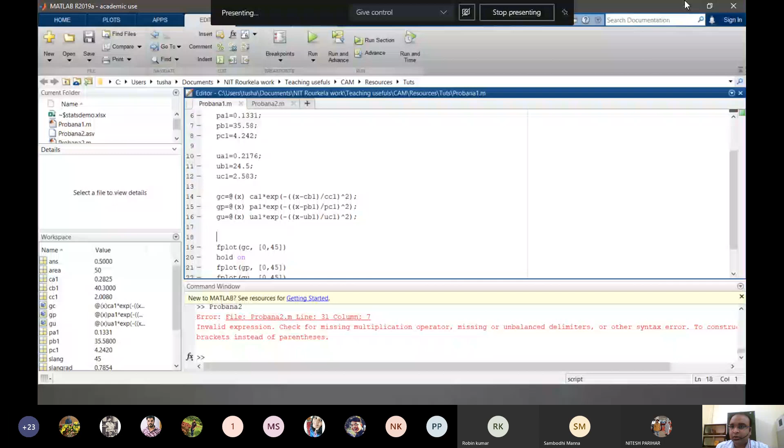So just to recap, we were making probability distribution functions. We were generating those, and what we did till now is we basically saw some randomly generated data, and on that randomly generated data, we converted into the frequency distribution for cohesion, friction, and unit weight.

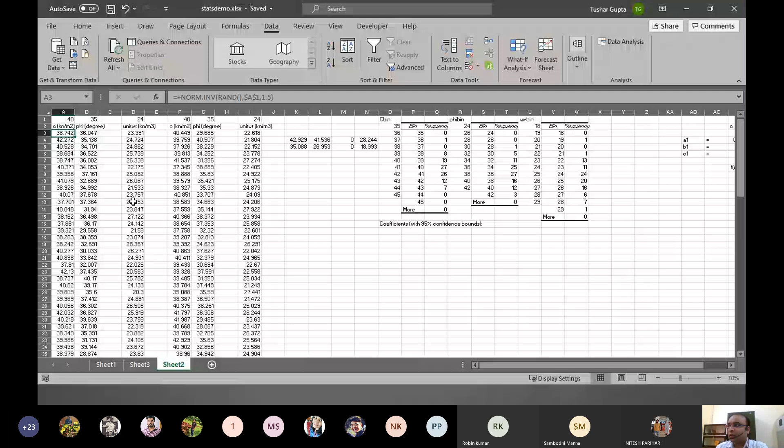Based on this, we did a curve fitting analysis, learning how curve fitting works in MATLAB. We saw what the parameters are, goodness of fit, and so on. On the basis of that, we fitted an equation representative of a normal distribution, a Gaussian type equation with three constants - two representing mean and standard deviation, and one being 1 over 2 pi of that standard deviation, the fractional part. Based on those, we calculated all three by the curve fitting method for all three distribution functions, and found the coefficients for this equation.

We actually tried to plot it. We saw how a function handle can be defined in MATLAB - a function handle basically gives a relationship between x and this y value, so y is a function of x represented by the equation that precedes it. So that's where we had reached. We were also seeing how plotting can be done.

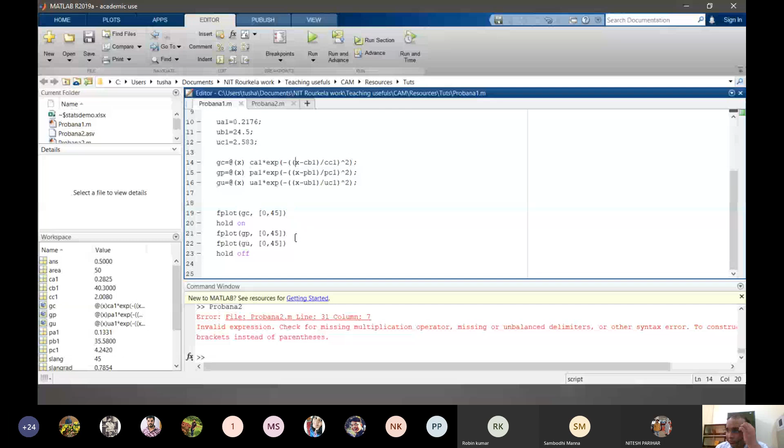Plotting is easy - the function fplot was used, and we gave a range for which range we want to plot, and a hold function that helps us in plotting multiple equations or multiple plots on the same figure. So we were plotting all these three Gaussians. Let's see where we reached last time.

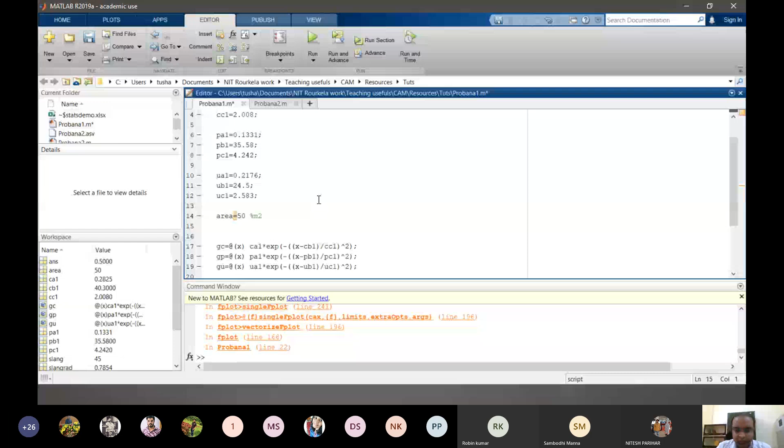And what else we need? CA, and we need the psi values or the psi p, the angle of the slope, for considering a typical angular problem. So angle of the slope, let's take 45 degrees. Slope angle, okay - slang equals 45 degrees.

Just to make us remember, we are making some comments on that. Do remember that when we do some cosine functions or sine functions - for example, let's say we want to find out what is tan 45 - just the normal functions actually take 45 as in radians.

So this has to be basically converted - 45 degrees have to be converted into radians. We can simply do it by multiplying by pi by 180. So that we have to take care of - either do it during the equation formation, or we can do it here.

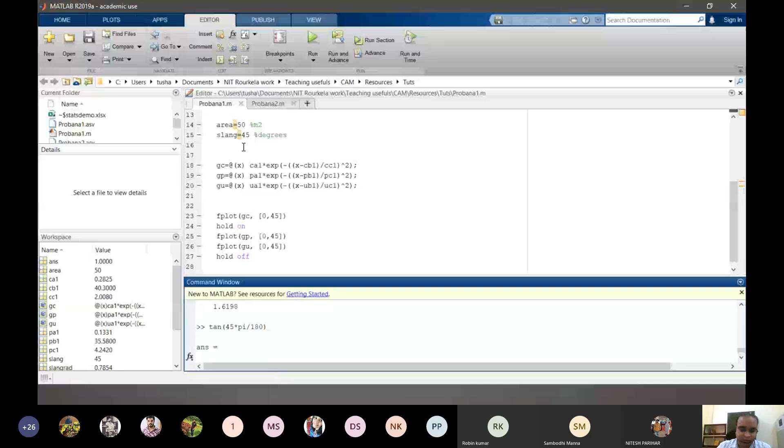Slope angle in radians - so SAR equals slang into pi by 180. I think this should work. Let's put some braces.

Semicolons will not produce extra answers, so that's okay. Converting to radians. Correct. Now, these definitions are already done.

Let's keep them as it is. But we have to define it again, I'll give you the reason. The intuitive way to do something like this would have been just directly using our formula, that is Ca plus sigma tan phi, and sigma can be the W cos theta component, or the unit weight cos theta component, cos psi component. So let's do that.

Let's find the forces now. So forces, uh, these are plots, so let's remain them as plots. Okay, and these are the inputs or variables, just to segment them properly.

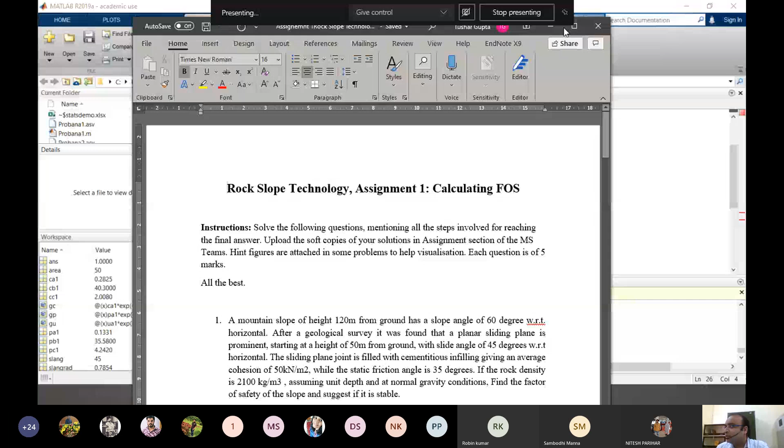So we used, we had the first assignment of RST, right? So let's use those to just calculate one problem here. We already have unit weight and other values, so what we need now is just the geometry.

If this one has something, if the rock density is that's okay. This is given, this is given, this is given. So let's use this answer, the solution for this, and try to simulate. We have this demo, hold on.

So for this question, we have area of 50 meters square that is there, and what we have is a weight of... how much weight do we have here? Which question is this? 5210... 2100, right? So, yeah, just a sec.

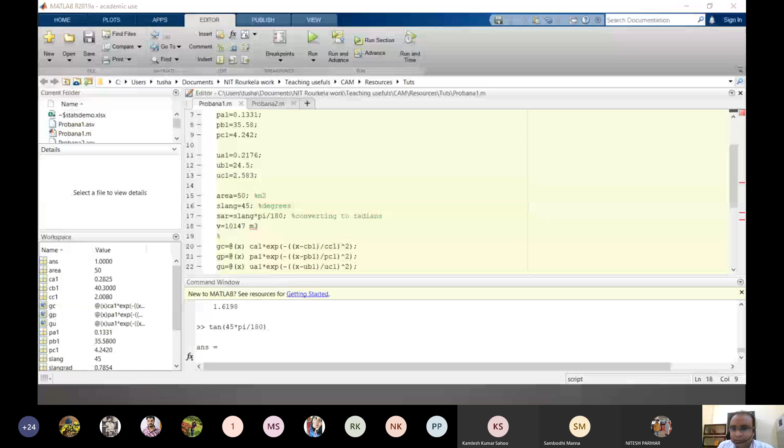So volume is this. For calculation of forces, we need certain more functions, like for driving forces, we have W sine theta on the lower side. So what we'll do is we'll calculate the weight. So weight will be, let's make a function in this way, the weight x, and weight will be volume into the unit, so it can be the unit function, the whole this, right?

Let's paste it here and also multiply by volume. So this will be W, and we can actually enclose it in one bracket and put a sine. I think this works, right? So FD can be this.

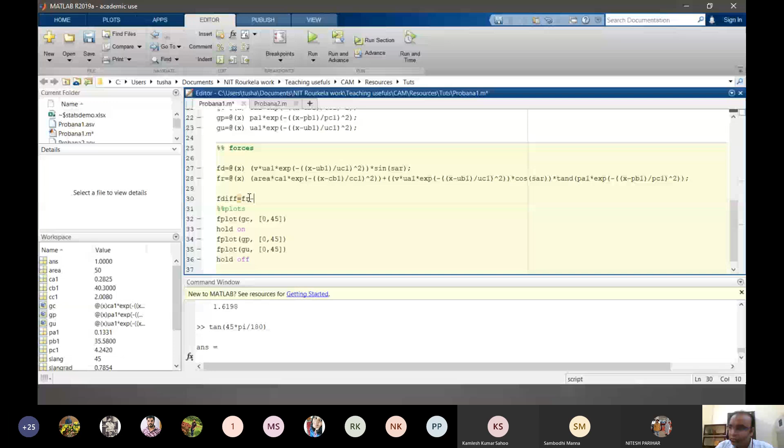All done. So what we can do now is let's plot this and see what happens. We need two more things. We need a difference function, so force difference equals Fd minus Fr, that's simple. Oh sorry, Fr minus Fd, the resisting force minus the driving force, right? And we also want to calculate the factor of safety function, so we'll do that later on. Let's first see where we have reached till now.

So let's plot Fd and FR, let's keep this in. I don't know what the ranges will be, so let's just plot it and see if we are meeting the ranges. Fd minus FR, remove this now.

And run. So where did the plot go? So these are the plots.

The good thing is both are well separated. So for our case, the difference will be too much.

So the orange one is our FR, the resisting forces, and the blue one is our Fd, the driving forces. So essentially what we are measuring here is the forces in kilonewton, and the distribution is shown in terms of units on the y-axis, showing how much that is distributed.

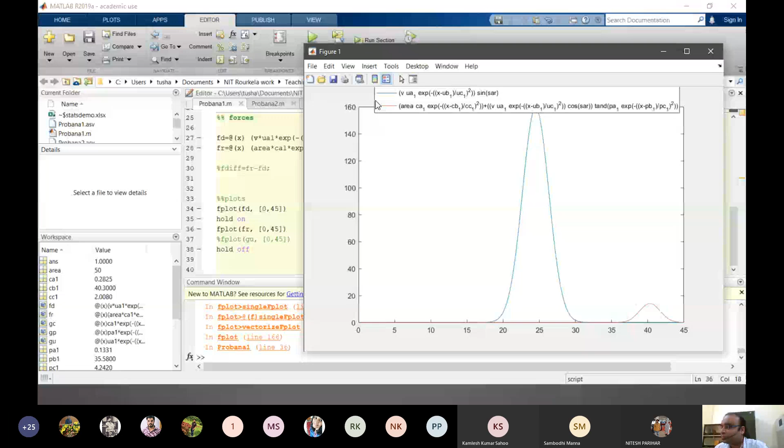So this kind of analysis is what is done in the margin of safety that we discussed, right? In that case, these kind of differences are seen. You can plot a difference equation and so on.

So further to that, what we can do is make an FOS function, just divide these values one over the other. We can even plot an F difference function.

I think something is wrong in this. Yeah, I think we can't do this. Let me check out, we can do this, I feel.

Okay, I have to define this as well. Oh, my mistake. So F difference is also a function of x. So I have to tell the system that it is also a function of x, so it is an operating function operator, and then it can actually do that.

So if I plot a difference, I think it will be zero, but let's try. Let's try to do the plotting of F difference now. Let's see what comes.

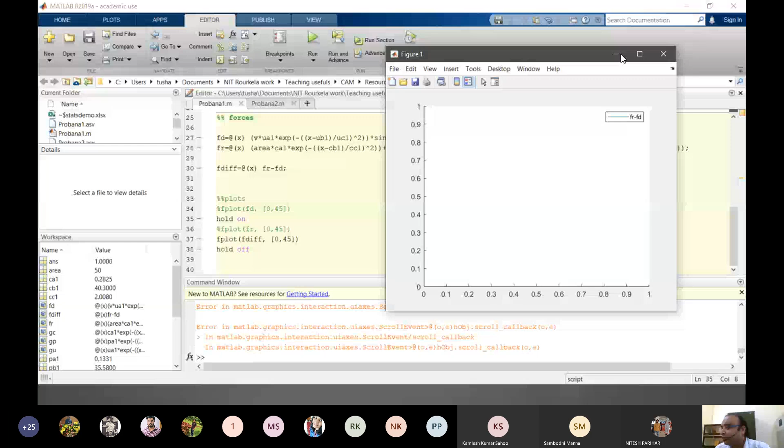So that's it. So similar sort of analysis can be done for all the slope cases. We could have made the data with respect to what we did in one of the examples, I should have remembered that, so that would have been more useful. But anyways, the whole purpose is to see how things are done.

So what we saw here is basically how functions can be plotted in MATLAB, how the functions are defined, the operator functions are defined. These are called function handles, right? And how these equations can be defined, how the curve fitting is done, and how we can basically write a code to plot them and see them with respect to each other.

So that's the whole exercise, I'll stop here. We can also try and find the factor of safety and plot that. So do that, try doing that and see what you get. It's just simple factor of safety.

You have to define it as a function of x, and you can just use these equations to define the factor of safety. Try plotting that and seeing how it is coming. I'm pretty sure it is much more than 1, so that is good. So do try that, do see what is the distribution of factor of safety.

I won't be doing it now because I have to move on. This has taken a lot of time, I was not expecting that. Try doing a factor of safety calculation similar to what we have done here. Use these values, or by your own curve fitting you can try, for that assignment we had.

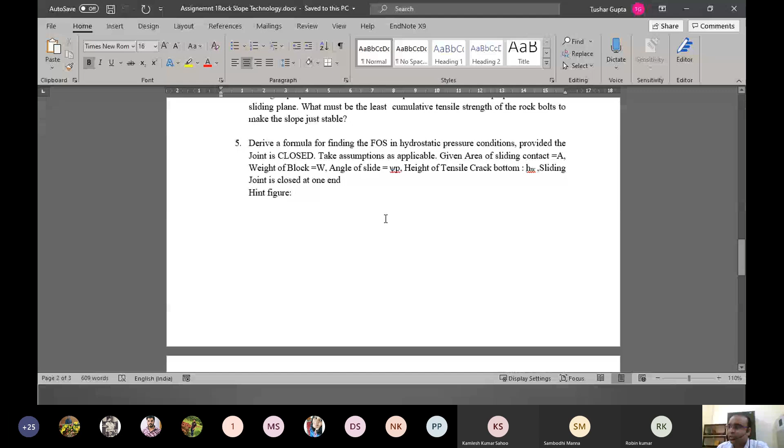Use any of these assignment problems, 1 to 4 — sorry, fifth one was the derivation. So use any one of those 1 to 4 assignment problems, take it up, make a random variable generation for C, phi, and unit weight. Do calculations for that and find a probabilistic approach for this. Just one question, don't do it for all. Choose any one, whichever you like, do it, and keep it as your lab journal work, okay?

Find the distribution functions of force, find the distribution functions of resistive force and driving force, find the distribution function of FOS — FOS I'm not doing, try it out yourself. Do share your results and see how things are coming.

Okay, is everything clear till here? Is everything clear? Understood? So let's move ahead, let's close this.

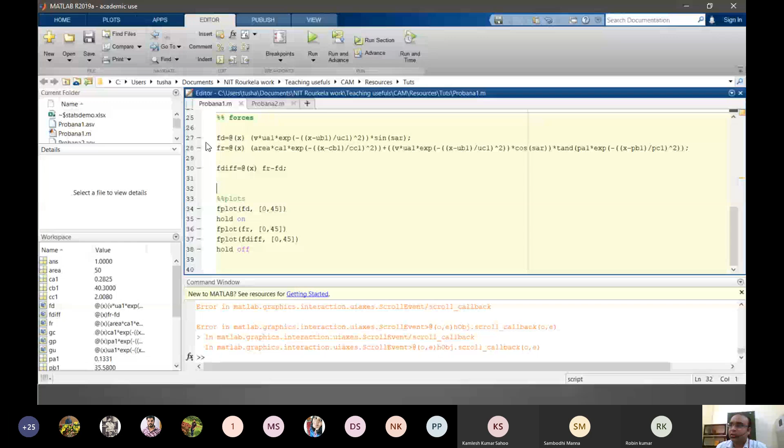We'll close the probabilistic analysis now. MATLAB will keep on coming back and forth whenever use will be there. So for now, we'll keep away with the MATLAB.

So let's come to now limit equilibrium method. Any issues with the tutorials? Did you guys have time to go to the tutorials? Amritesh said he did, there were two questions with him. Anyone else? Any questions regarding tutorials? Any work regarding the slide software that gave some results that were not clear, or something that you found interesting? Do share.

What happened in... so tutorial 10 is water table statistics.

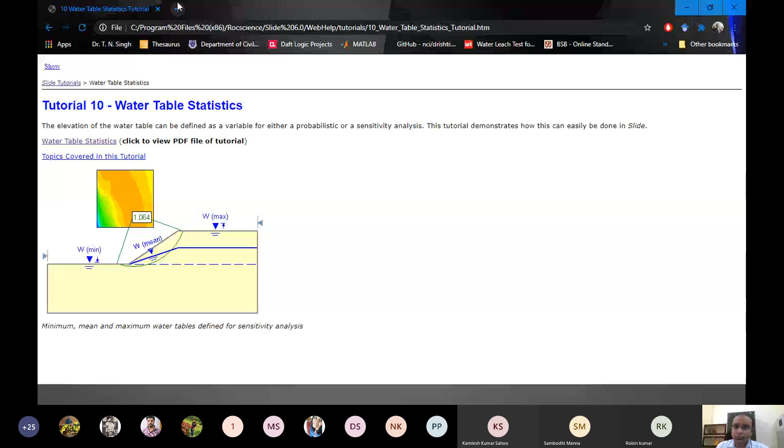So what was the issue in this, Amritesh? What were the issues that were coming in this tutorial? Amritesh? Hello, yeah Amritesh, hello. Yes sir.

So when I was trying the tutorial, after doing the modeling, when I saved the file and computed it, it showed that there were no failure surfaces found. There were no failure surface found.

Okay, let me check it out. In this, at least, I'm seeing some failure surfaces are there. Yeah, failure surfaces are there.

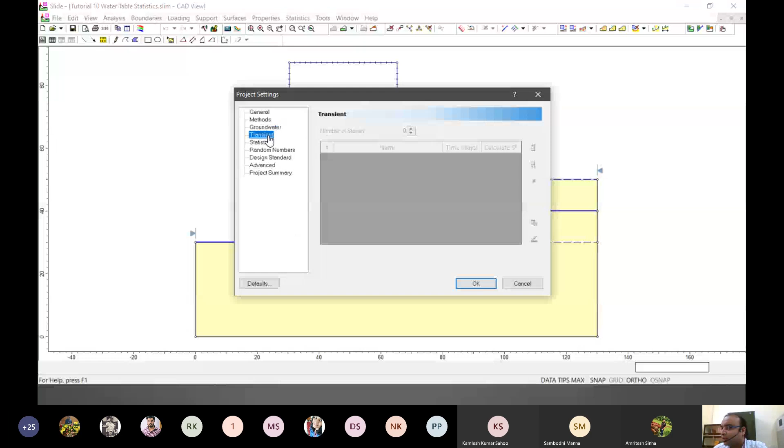Because from what I am doing here, it's basically nothing different from what we did in our previous tutorials, just that it's doing some sensitivity work and some groundwater under the level of water surface. Properties are defined as usual, and it has given a grid search, and a grid is defined, right? So do check the grids, do check these limits, and then see, because right now when I interpreted it, let's do that again if that's a problem. So it's giving some surface at least. Maybe some of those things can be checked out.

No failure surface found — what other reasons can be there? One of the reasons, so when I go for the sensitivity plot... Oh, when you go for the sensitivity plot, hold on, okay.

You're not getting this? No, so afterwards it says to open the second tutorial file. After this plotting, the next step is to open the second tutorial. Let me read, I have maybe skipped something. Let me just read what it says in the interpret portion.

After interpreting, open the tutorial file. For this demonstration, we will read in a different file. Tutorial 2 is starting. Notice the file we have read in already includes a deterministic water table.

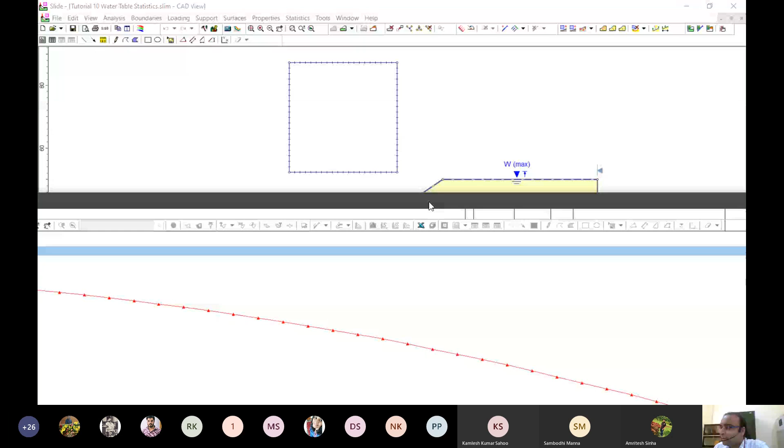Here a water table has been defined, and its ranges are given, and what we are seeing is how the factor of safety changes with respect to the distance and other factors.

Let me just close this first and see what they want to do now. Okay, let's bring this tutorial here. Just Amritesh, bear with me, because I will explain everything quickly, and then we'll move ahead. Okay.

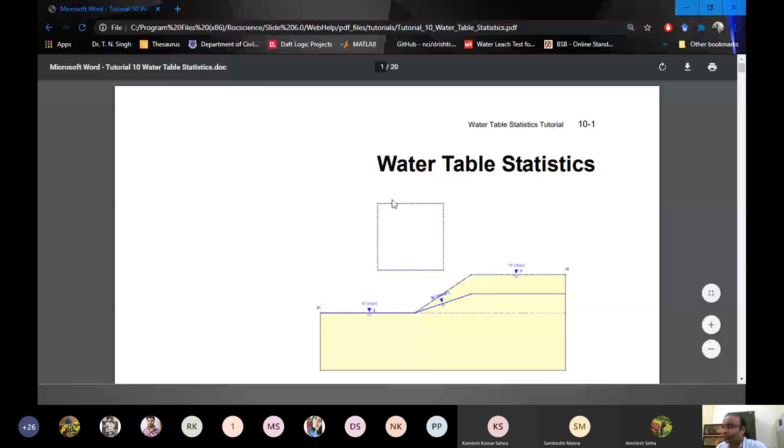So just for all of you, this is basically how the statistical analysis is done in a water table scenario. They have basically defined maximum and minimum locations of the water table, and if this is an average one, where it will be. That is based on the data they have.

They have done both types of statistical analysis: one is the sensitivity analysis that we discussed once, and they have also done a probabilistic analysis in another folder. So they started with our main file and changed the settings as in the sensitivity analysis one.

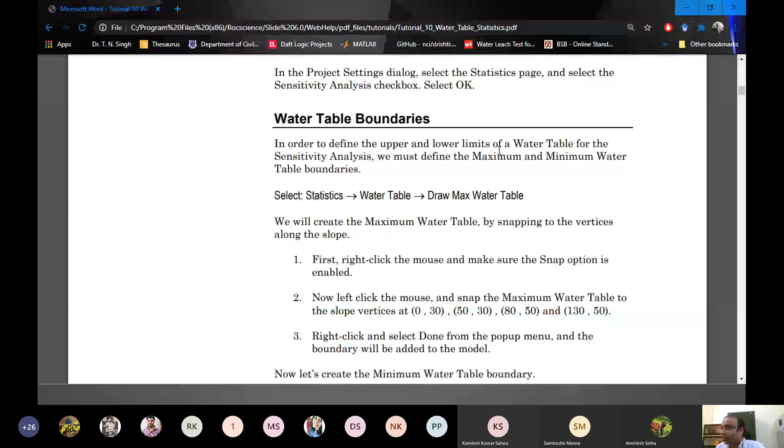They have given a water table boundary, so draw max water table and draw minimum water table options are available. This we can do easily, like they have done. And based on that, the third water table will come up based on the mean values of these water tables.

So what practically is happening is they are giving a slope. They are simulating a slope, assuming it becomes totally saturated at one stage and totally non-saturated at another. Water table is lowest here, meaning the slope is not saturated at all, and in the maximum case, the whole slope is saturated.

On the basis of that, the simulation took a mean, showing the water table as half saturated and half unsaturated. The practical relevance of this kind of simulation is that. Okay, let's continue.

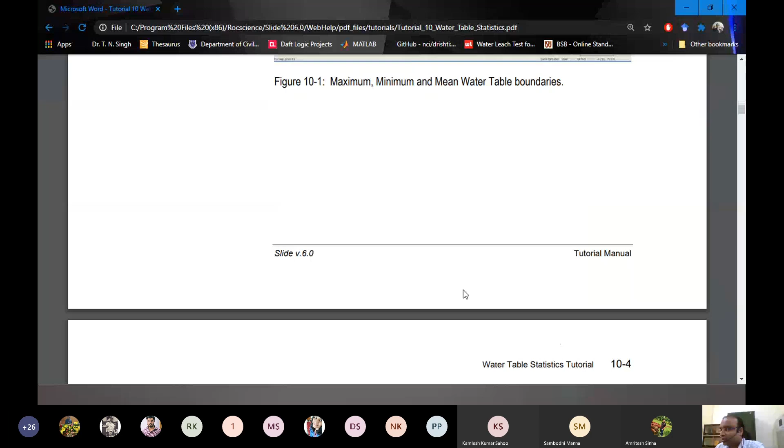So they have defined these maximum and minimum values, and after that they are defining statistical properties of the water table as well. They will change the normalized mean, and that's how they will do the statistical analysis.

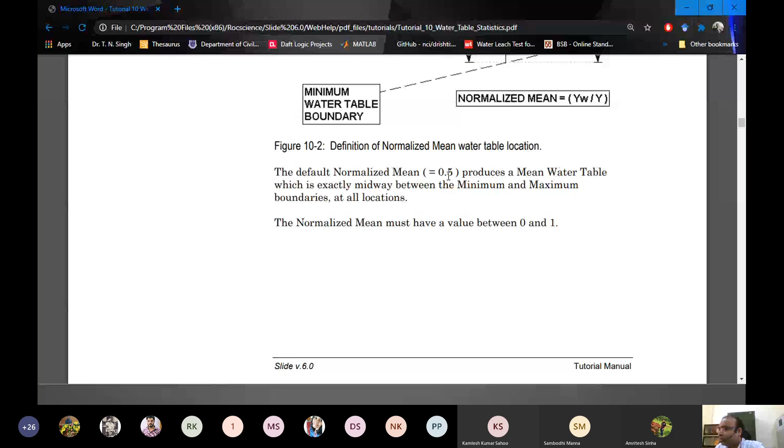All right, let me show you this. In the statistics, if we go to the water table, the statistical properties are there. Here we can give a full distribution of how this mean is calculated. If you see, normalized mean is at 0.5, meaning the average of maximum and minimum lies at the center.

It can actually be changed if required, to 0.25 or 0.75 as per requirement. In some cases, if there is a chance, if we do a probabilistic analysis, we can actually give a distribution to this as well. We'll see that also later on.

So let's click OK. And what then they have basically computed it simply and found out what it is. This is where they are basically defining how a normalized mean is calculated here.

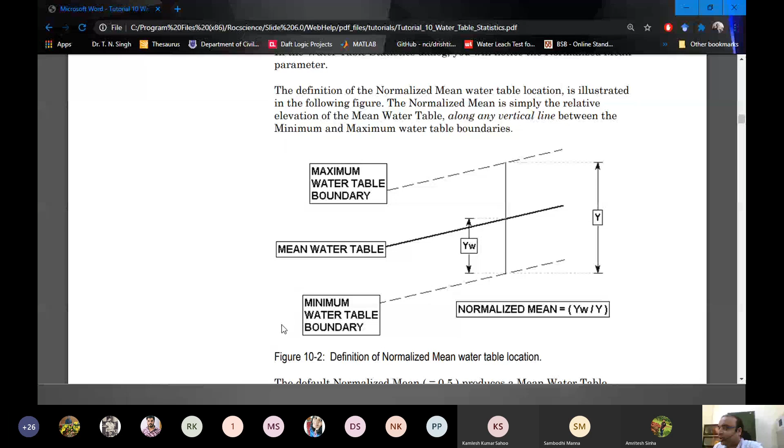So the maximum, minimum, and mean water table are basically calculated by this ratio that we just mentioned, and on the basis of that ratio they can place the mean water table wherever required. A normalized mean of 0.5 produces the mean water table at the center. If you give any value between 0 and 1, it will shift towards the minimum or towards the maximum water table value.

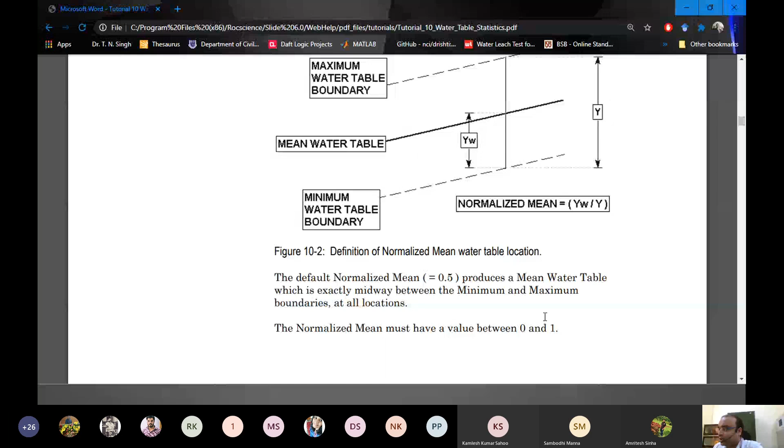We compute it, we save it, we interpret it, and we saw the interpretations of how the sensitivity curve of water table location can be seen. So if you see, let me check it out first.

So if you just compute it and interpret the results, based on the water table, it gives a certain factor of safety.

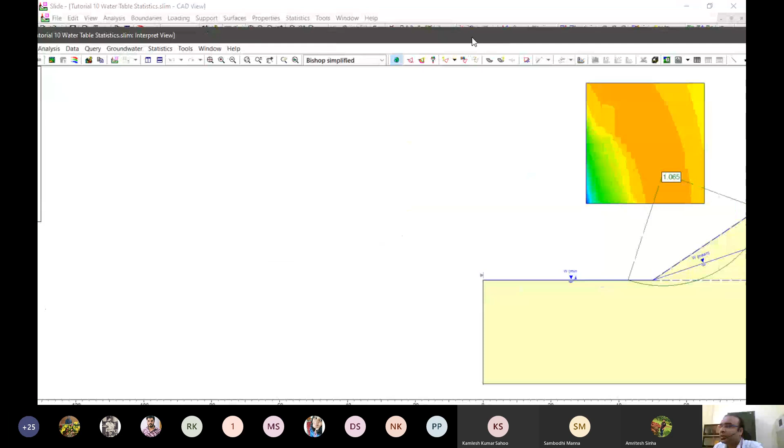So what it basically indicates is in case of high or full saturation, the least factor of safety we can get is around 0.6. And at the lowest saturation, where the slope is not saturated at all, the factor of safety we get is around 1.28 or 1.3.

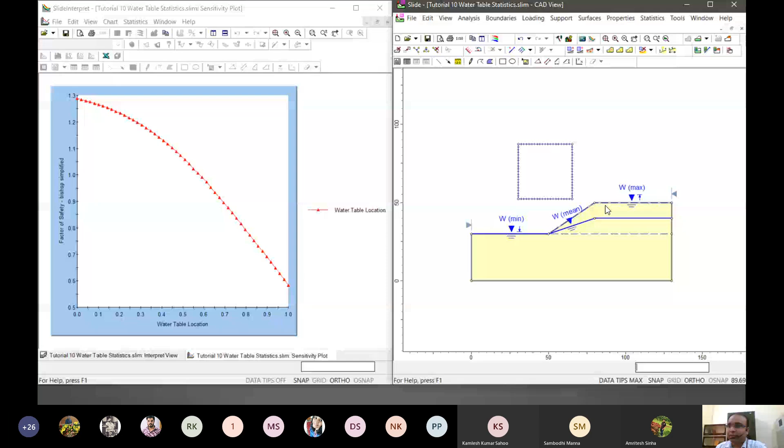This kind of study is very helpful when we see seasonal water variations, when water changes level from one season to another. Suppose a dump slope or internal dump is there, which has the capacity to store some amount of water, or some hydrostatic pressure develops due to rainfall, or there are issues in drainage and water gets stored inside. This is how these water tables start developing.

Saying that a mean average water table is here may also indicate that effective drainage can happen. Maximum it can reach here, and the mean is here. If we assume it as fully saturated, we can take it as the maximum water table, and this is how all the factor of safety changes.

Now, as we were discussing, in sensitivity analysis all other factors remain constant and only one factor changes. Here also the same thing is happening—only the distribution of water table is changing, how the mean shifts from one place to another, and based on that the factor of safety change has been given.

Now what's next is the probabilistic analysis. Let's see what they have done.

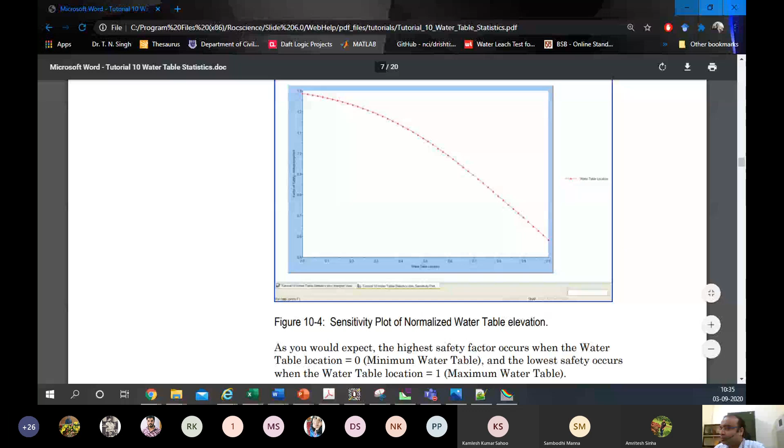For the demonstration of probabilistic analysis, they have taken the second material loading and started the Monte Carlo simulation. They have used a deterministic water table as the mean, and then given a statistical distribution. So basically they have taken the same thing.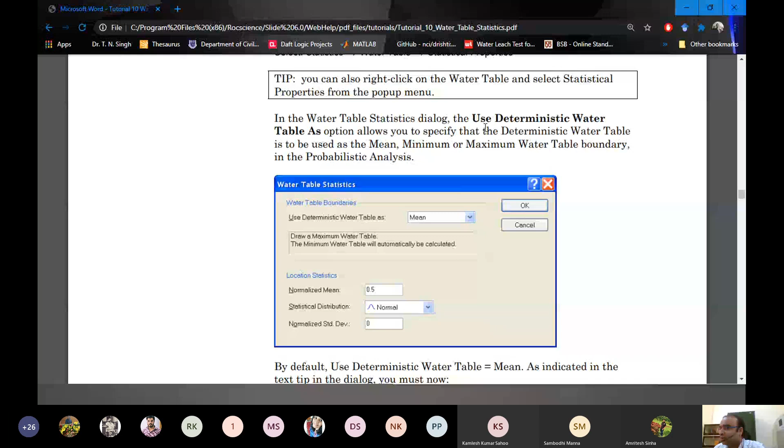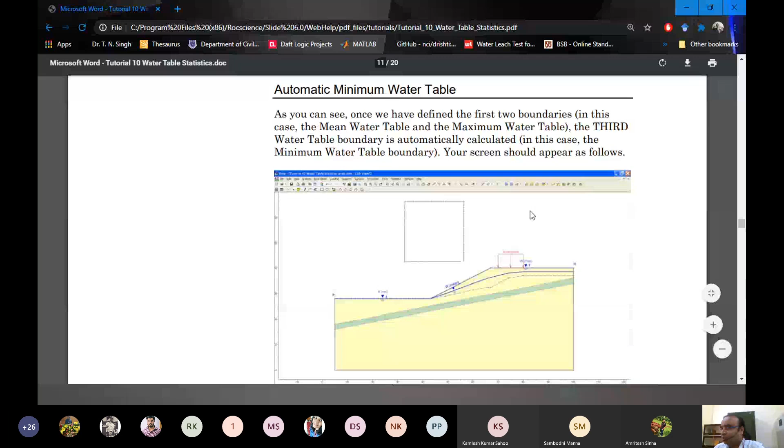Okay Amritesh, let me first see if we can do it here, and then we'll check if it's not coming for the second tutorial. Let's see first here and go for the methods, the statistics and probabilistic analysis.

In the statistics, when we go to the water surface, we now have a full statistical option as well, so that can be done. But if we do that now and compute, what we'll see is obviously a probability of failure and everything will be there.

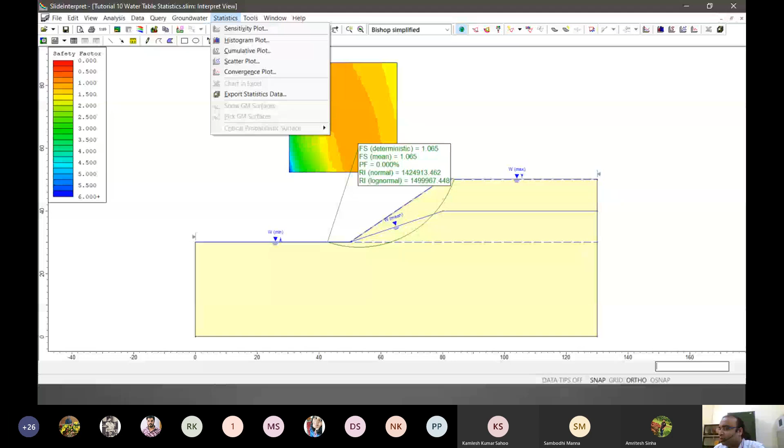Also, histogram plots of water table locations with respect to factor of safety can be plotted. So let's plot that, and scatter plots as well.

We have to select something, let's check this out. So what this is doing is—let's just start by what they are doing and see what happens. Maybe what Amritesh is facing, we are also facing that.

Let's open the tutorial 2 file, go to the project settings, and change the statistics to both. And nothing else, global minima, that's okay.

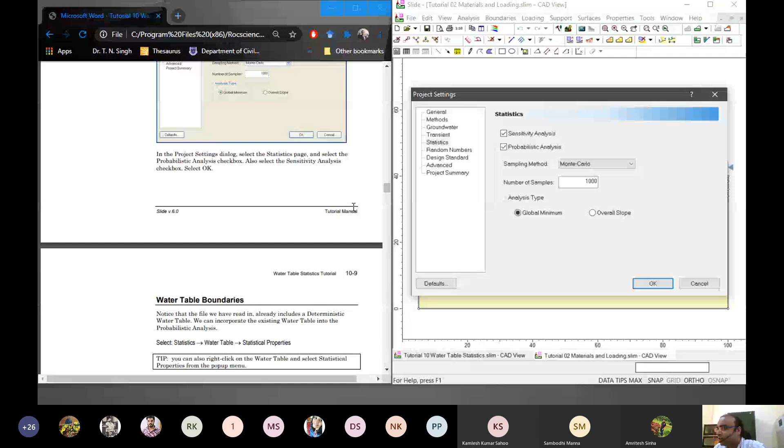Notice that the file as we have read in already includes a deterministic water table—yes, that we have done. We can incorporate the existing water table into that.

So go for statistics and go for the water table. We are using the deterministic water table as mean, and using the same distribution vector as a normalized distribution. I think we have to change the standard deviation somewhere, otherwise it will just be a single value, as the option allows water table distributions.

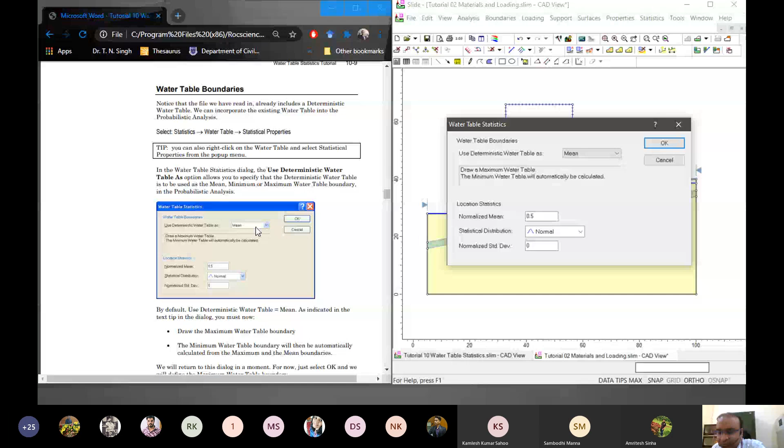Oh, during computation you faced that? Okay, let me check it out. Let's try that and see.

The standard deviation they have taken as 0. What I will do is take it as 0.3. Let's see... no, 0.15 on one side.

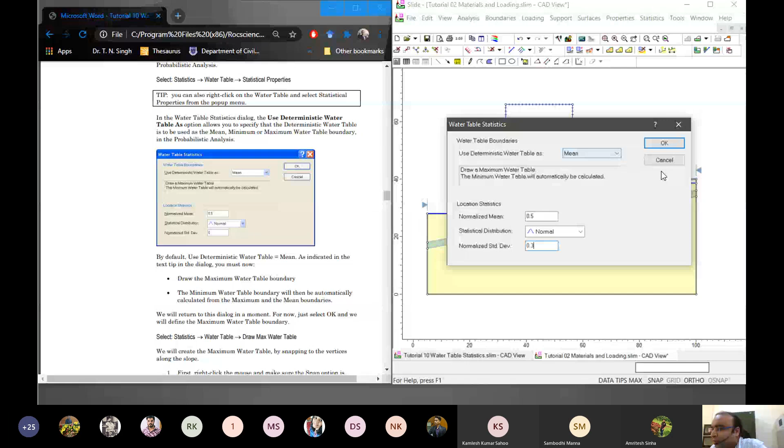Okay, and by default use deterministic. Draw the maximum water table. The minimum water table on a boundary will then be automatically calculated. So you can draw the maximum if you want.

In that way, do we... and it has calculated the minimum. That's okay.

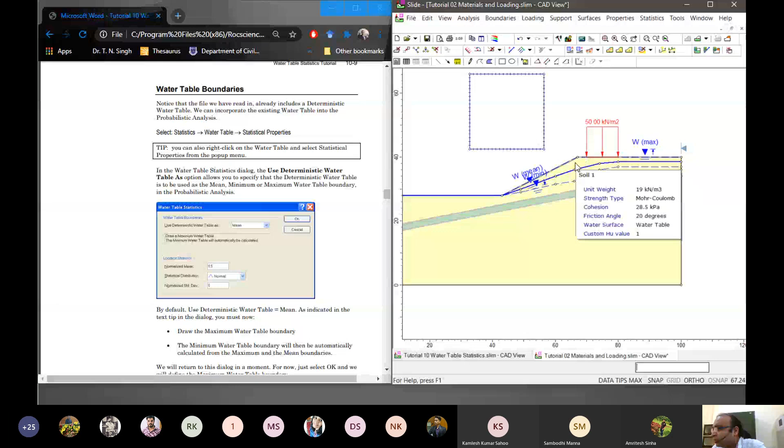So what we have done till now is this example already had a mean water table. Now because we have done a statistical analysis and given it a normal distribution, basically based on the mean and the maximum value, it has calculated a minimum value. So that is already done.

And then what is happening is that's okay, that we have done. Now observe the maximum water table we have just drawn is defined along the slope surface. Right, we have obtained that. It is calculated.

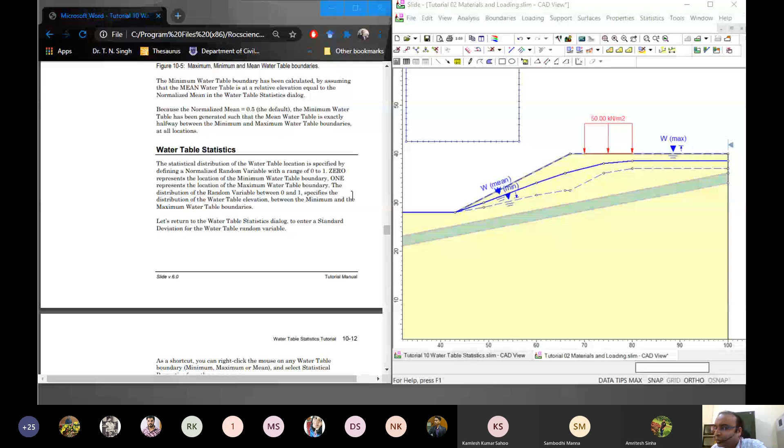Water table statistics: the statistical distribution of water table is specified by the normalized random variable, 0 to 1. 0 represents this. Okay, and I'm just reading through because I want to see why that error came for Amritesh.

Standard deviation - yeah, that's what I was seeing. They also have put a standard deviation. Because if you don't put a standard deviation, basically it's just a single peak. Single peak means just the mean, and all the values are at the mean. So standard deviation has to be put.

So I think we have already put that standard deviation as 0.15, right? Yeah, and that's it. So normalized standard deviation is put.

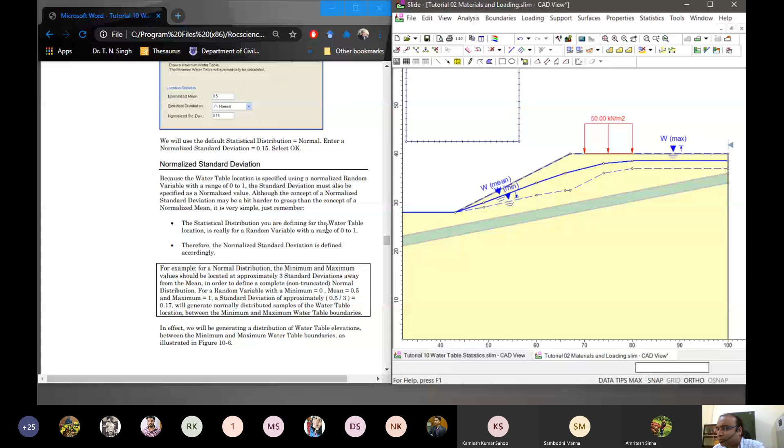So that's what the purpose was. And let's try now if we face the same issue as Amritesh did. Till here, I think we have done. Let's save it as something else, just to make sure other files are not disturbed. Tutorial... water table stats. Okay, we do that, we compute.

Amritesh, for me, it didn't come. You were stuck in this part only, right? When you computed this? Yes sir, yeah, because I actually could go ahead. Why could I go ahead? I think my surface option was... Do check that, try that. Try doing without that, try doing a circular that way. See, only finding non-circular, maybe that's the reason it was doing that. Try doing that and see if you get the same error.

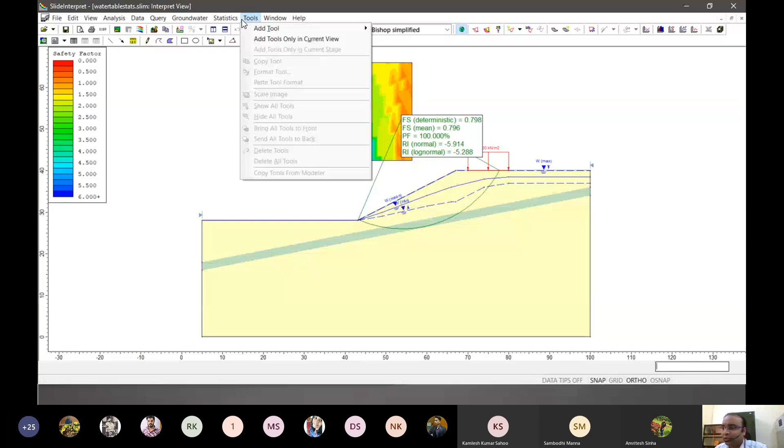So for others, what we have done, we have basically tried doing a probabilistic analysis now. And if you see how the factor of safety is basically very less because of that, and 100% chances of failure - so basically the failure has happened, and let's see what kind of analysis they have tried.

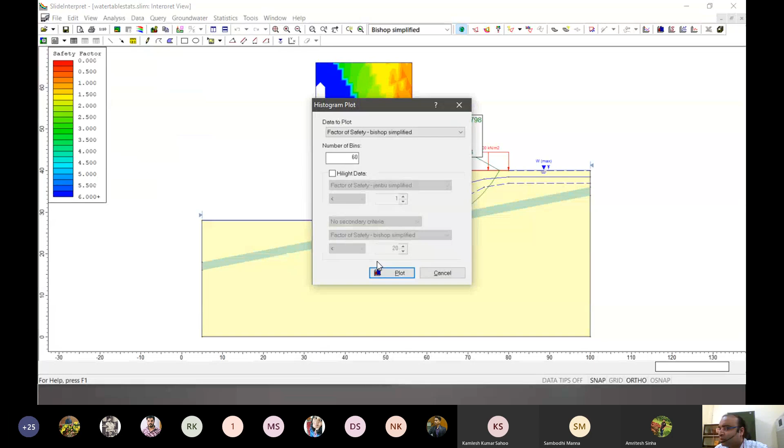So yeah, something similar. And if we see the histograms, okay, so we can see the histograms, how the probability and the factor of safety of a probability distribution is there.

We can also see how the probability distribution of water table is there, so water table, how it is being changed. For our case, we have defined a mean at 0.5 and given a normal distribution between 0 and 1. So that's how the water table is changing.

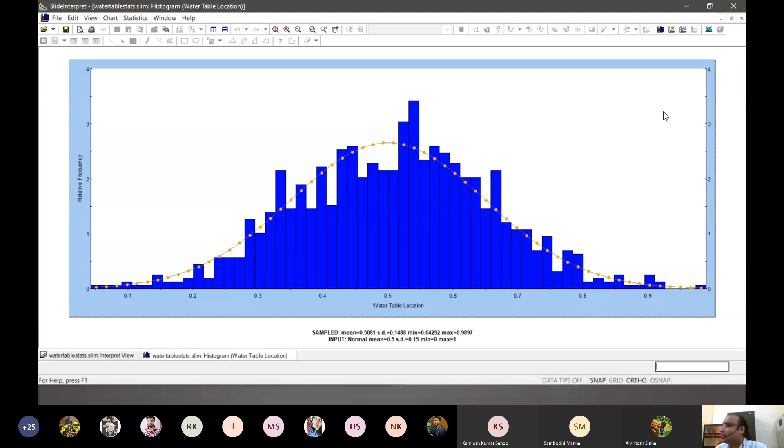Practically what it means is this kind of distribution basically means that between the maximum and the minimum, how much variation is there. So if the mean is kept here, how distributed the maximum and minimum water tables will be. So based on that, obviously the factor of safety will change, and that's what it has calculated.

So what's the purpose of this? Why have we done all this here? Basically, probabilistic analysis - again the concept is the same. When we have very less idea, or some idea only, of how things will be distributed, and we don't know exactly what it will be - we don't know a single value, we know that it can range from this to this - so based on that, basically a probabilistic analysis is done.

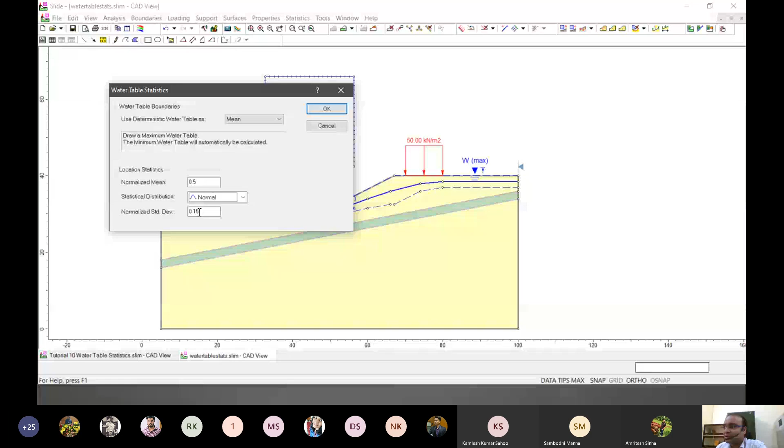Probability, how it has defined - basically it has taken a mean, and on the basis of the mean it has distributed the values in the form of a normal distribution. We could have changed the type of distribution - we could use triangular or log normal, anything - and it's taken a normalized standard deviation. On the basis of that, it has tried to vary this water table from a fully saturated point to a not-so-fully-saturated, or a lower mean value of this.

Perfect, you got that? Okay.

I think some issues are there, small things will be there. Do try it again wherever you are facing such issues, and do try to plot and model those again. I think tutorials are good enough to learn what is happening, why these exercises are given, and what is actually practically happening - practically it is being changed from saturated to non-saturated district. So do check out these tutorials.

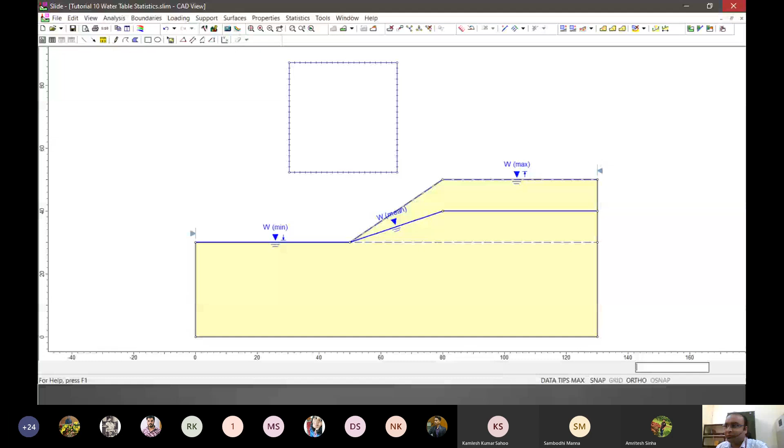Anyone has any other tutorial problem? Amritesh, do check out the same thing on the 16th one as well, if maybe that's the problem there also, and see if it works. If it doesn't, we'll see it later sometime. So it's working for Swati - perfect, awesome.

What else? Anyone else had any problems in this tutorials of limit equilibrium? Slide software, do check those out. Why I'm saying this is because it gives a good idea of what is happening, why it is happening, and why we are doing it. And especially, it gives us a nice training for our further simulation works. So do complete if you have not done.

What I will do further is not do LEM or slide tutorials from now. What we'll be doing later on, because we will probably be starting finite element method, is something called phase software. Phase is actually very similar to slide software, but it is based on finite element method. We'll be learning about finite element method soon - what it is, how it is done, what are the differences in finite element and other methods, what is the concept behind it, and so on. So we'll be doing that, and we'll be seeing how things are different.

So that's it for limit equilibrium. If anyone has still any problems, any concerns, any doubts, any comments, any suggestions regarding till now what we have done in limit equilibrium or whatever tutorials you have done, you can discuss now. I'll give you 1 minute before I start the second part. I want to discuss a case study of how things are done in practical field - how a case of slope stability analysis was done, what kind of situation was there, limitation of data that was there, how we interpreted it, and how we could give a suggestion for the solution that was there, how it was implemented. So we'll discuss that in 1 minute. Take 1 minute, if anyone has any doubts. After this, we'll start that case study thing if no one has any doubts.

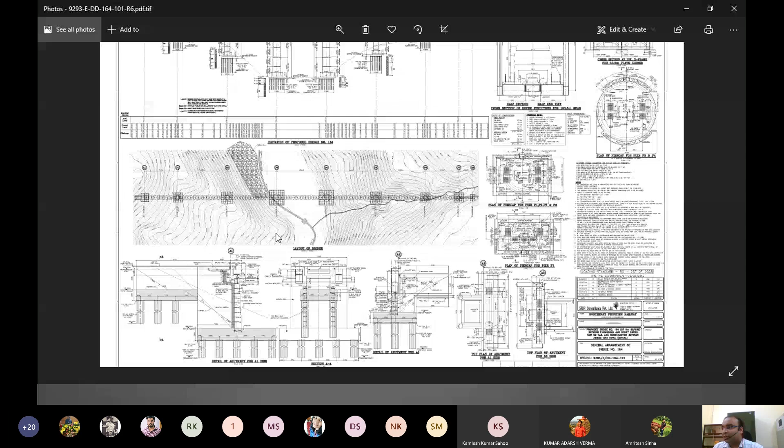The situation was there were two tunnels. If you see this contour plan, there is a tunnel on the right side and a tunnel on the left side, and a river flows in between. Both are mountain sides, left and right. So to connect those, they are building one of the tallest pier reinforced bridges.

So this will be one of the tallest bridges, one of the tallest piers in India that is being constructed there. I think work is quite ahead now compared to what it was at that time.

So these are the two mountain ranges. Here are the tunnels, tunnel entry and tunnel exit. Two tunnels are there, and this was to be connected by a bridge. So presently, when we got these details...

The present situation was that these piers were basically being made. Piers are basically the base on which the main bridge will be sustained. So what the problem was, these slopes you see...

On the left as well as on the right, both were very unstable, and especially considering we had to construct so many piles inside, we had to do extensive construction, and a huge load had to be applied on these areas. So a full scale stabilization was required for this kind of slope.

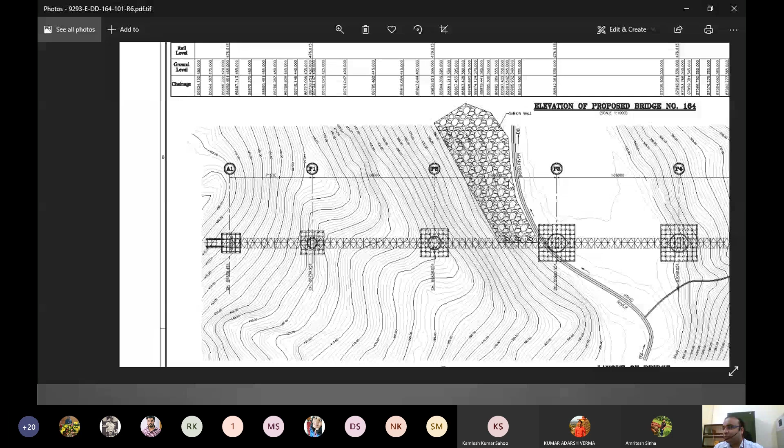So wherever they have actually done the construction work, they had to bore the piles first, and above that they will build these piers. They have done this piling work inside the ground, to a good enough depth of more than 15 meters or so.

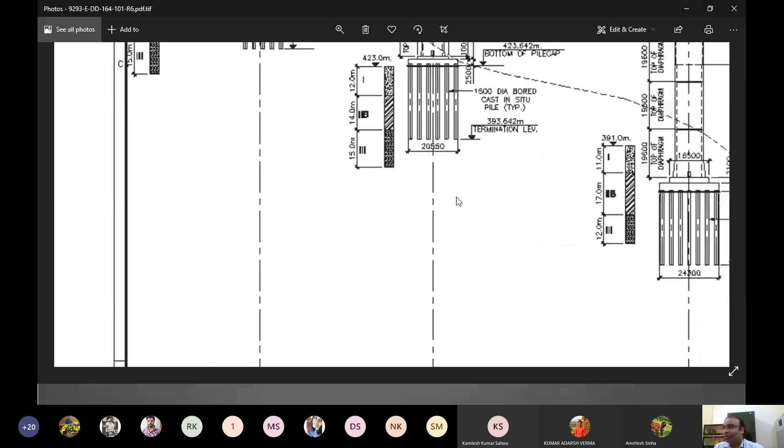Based on what they found during the excavation, they basically gave us how the soil or inside profile was there. This was done at four piers along the slope, so we have data for locations 1, 2, and 3, and 4 sets were there for the inside profile or geotechnical profile, and on the top view we had these contour maps.

So that's the only thing we had. That was the huge limitation of data. We couldn't do any lab testing because at that time it was tough to bring samples, and it would have taken time.

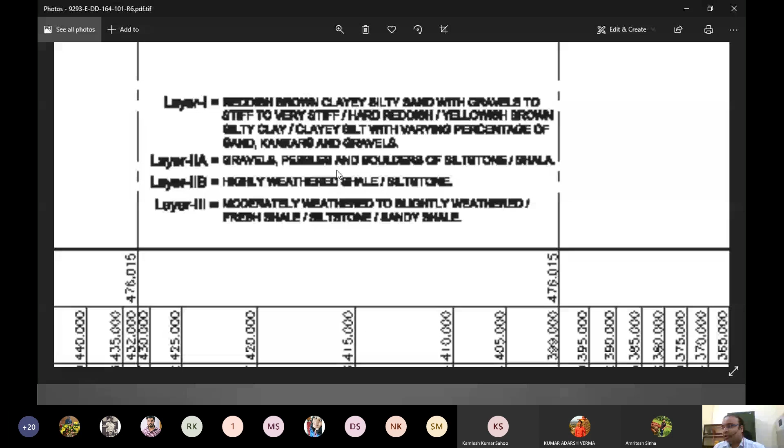They had done some lab testing based on whatever excavations they had, and based on that they had classifications of what kind of soil and rock was encountered, and their basic geotechnical properties like compressive strength, density, and so on. So we had that data, and profiles of 4 locations on one slope about the inside profile, and based on that we had to formulate a slope stability map. So how do we do that now?

The challenge was the missing data, since we have just one cross-sectional profile here, and we had to digitize and extract this. That's one challenge. What else we could have done is conduct our own surveys, which would have taken a huge amount of time. So what we thought of instead was this.

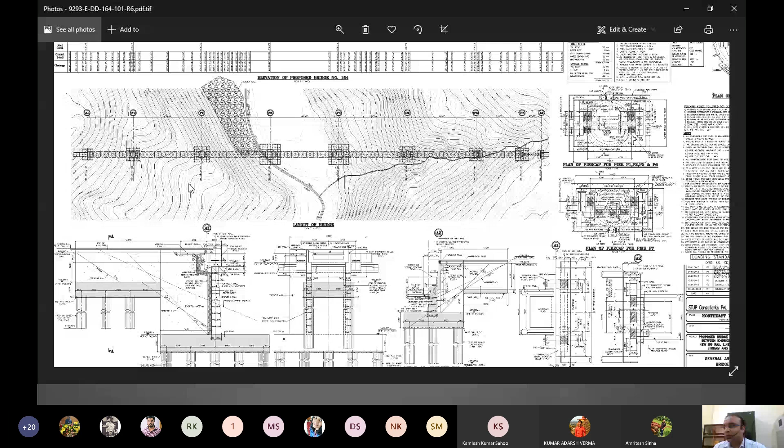Because we have these good profiles of contours, why not convert these contour maps into altitude profiles, essentially cross sections? So that's what we tried. Starting from that, we basically...

used these contour maps and divided them into 5 or 6 sections, at least 5 sections, taking the middle one as the base, 2 or 3 on the left and 2 or 3 on the right. So we had 5 profile lines like this. A profile basically gives us height versus the horizontal axis, so x and y values for the geometry, if you think in terms of simulations.

Now we had these x and y values for the outer profiles. What to do for the inner ones? For the inner ones, we had data at just 4 locations. The first type of soil is at 11 meters deep, till 11 meters. The second is from 11 to 17. The third is from that point to this point, and the fourth is below that. So we had this data at only 4 locations.

So in order to make a graded profile, because if you just simply connect these lines, that won't make sense at all, since the geometry of the slope is also representative of the geometry of the geological profile below.

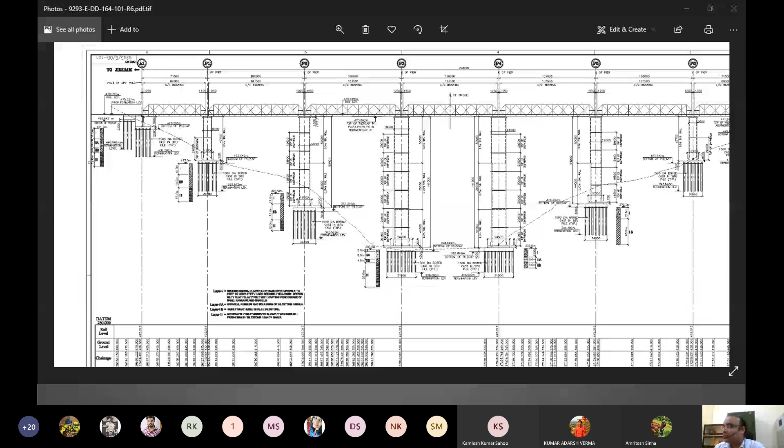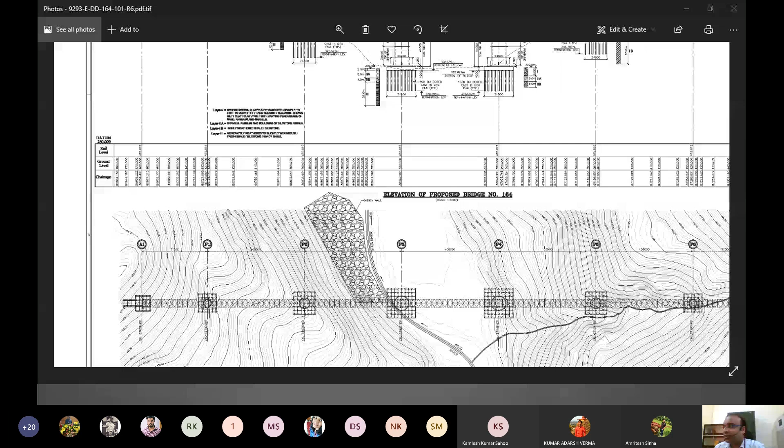The second step was about the geological section. For the geology, we started with some estimation algorithms. There were many such algorithms, but what we followed was the simple grading profile. So we found the lines' x and y values from the contours, and started from there.

So suppose this is the second line — the x of the second line is this, the y of the second line is this — so x and y for the outer profile. Now we have the material properties profile at certain locations. We marked those locations and kept them as constant, at 4 locations, and subtracted those as per the requirement in the main data set.

Then we started a gradation profile based on the outer surface, and based on the difference between these two values, we made a smoother profile between them. So we found the x and y values based on the outside profile and the inside profile — and we'll show you how these things turned out.

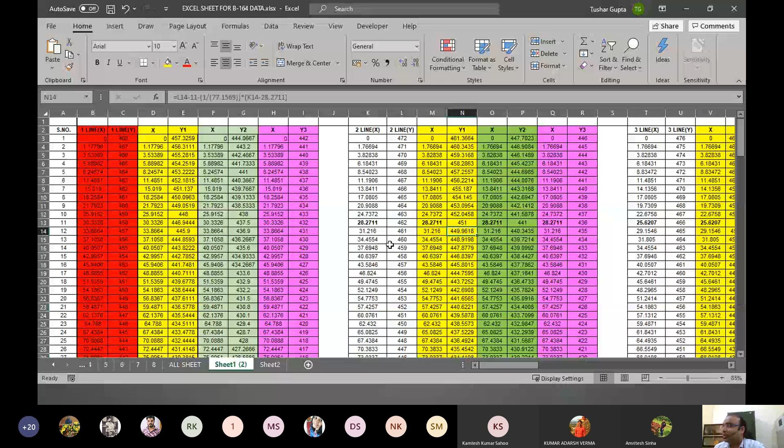So initially we had just this data, and what we got... we started like this. So the outer profile was this.

Like the second line, we could actually make it based on something like this, because we used the outer profile data and the data with the differences at the 4 locations. We could have just joined the line, but we actually made a graded profile according to that.

Now this is for just 2 layers, but we also had data for multiple layers — let me find it. These are all old works, so I'm finding where they are. Hold on.

So this is a cross-sectional profile for line 1. So for line 1, if I have the profiles, do I have the divisions?

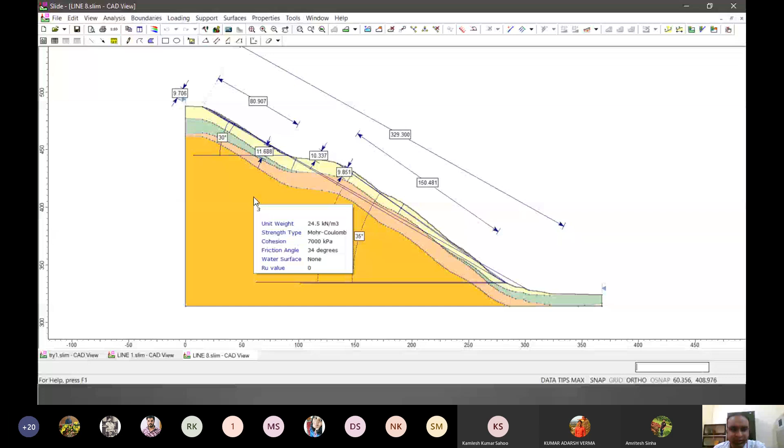Based on the simulations, what we found was... let me see if I have the fully simulated one or not. Okay, apparently not. I don't know if the material properties are correct in this. But if we actually simulate this, it will take a lot of time because the number of surfaces, the whole extent of this is too much. This one was actually around 150 meters high, and the extent was also enough.

So we did this kind of study, and what we found were where the slip circles were basically intersecting and what was the height and all. On the basis of that, we basically tried to find a solution. So that's what I wanted to show you.

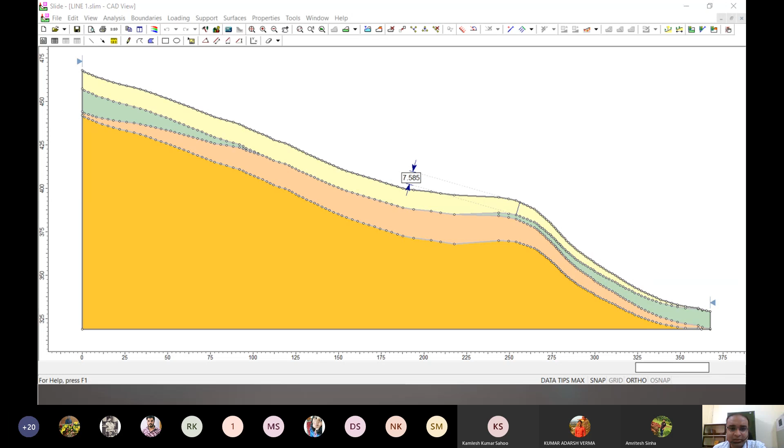So the solution that we gave, the initial solution, was something like this. The divisions that we were getting were not that deep. So basically the profile was failing along this side. These were the weak layers. The stronger one was anyways within.

So we wanted basically to reach the third layer. The third layer was quite strong, compacted silt or soil, something like that. The above two layers were quite weak and they had to be basically stabilized.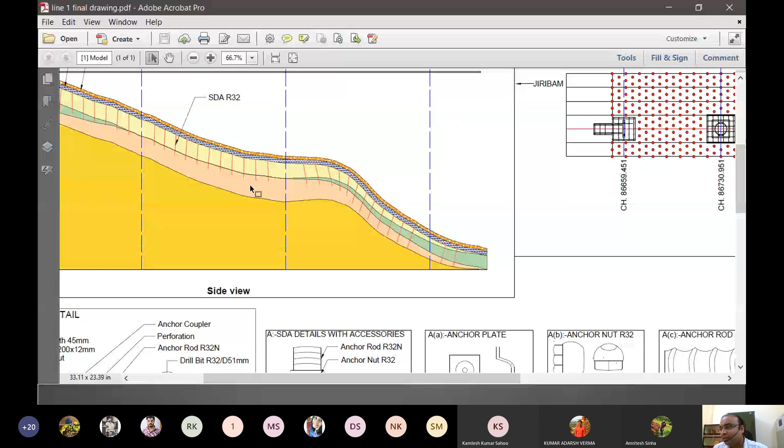So the solution that was presented here was threefold. Basically, first was these, you can read SDA, which stands for self-drilling anchors. The self-drilling anchors are something like... when you do a drilling operation, you use drill rods and drill bits, right?

So self-drilling anchors actually have an inbuilt drill rod and drill bit. You drill with the anchor itself, so it remains there. It has a sacrificial bit, and the whole rod that was acting as a drill rod now acts as an anchor. So the advantage of this is that you don't have to carry double equipment or anything, and you can use the same thing and just drill it in. Even the cost is comparatively less, because the amount of strength given in SDAs is much better.

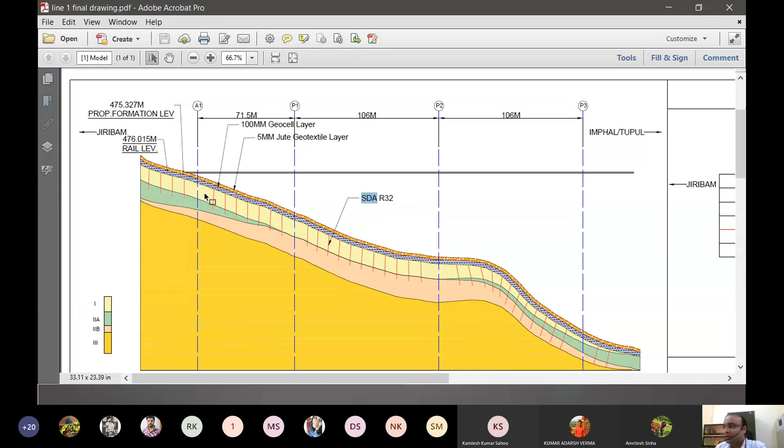And the second thing was we wanted to do some chemical grouting work as well. Chemical grouting work needs hollow pipes, because from inside these hollow pipes, the chemical grout goes out. So we also proposed a chemical grouting operation that would have covered the nearby areas. Based on that, that was one solution.

So this was the pattern that we decided, how the distribution would be. A staggered distribution of anchors actually helps in using less material to cover a larger area, so overlaps are ensured in the cross linking. If we do a square shaped distribution, there will be larger gaps. If we do this kind of staggered distribution, the gaps between the effective area of reinforcement reduces.

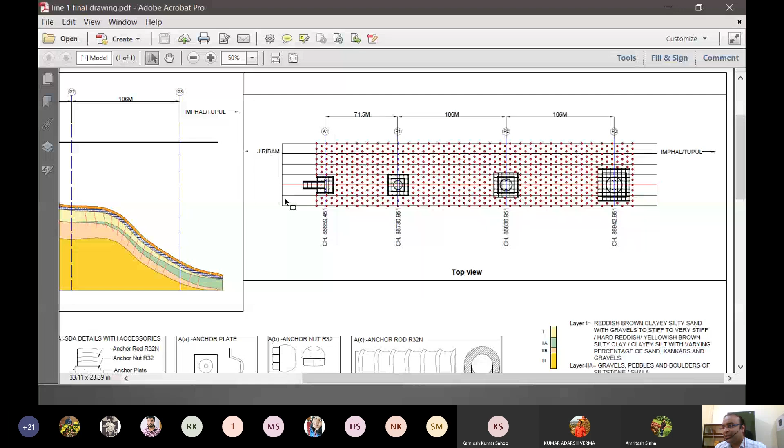So generally these days staggered distribution is preferred, again depending on what kind of work we are doing and what kind of solution we are proposing. The second and third solutions were also given. The second solution, apart from stabilizing this, had to also take care of the slope on the surface, like preventing superficial erosion. So there are some surface stabilization measures that are used.

In this case, what was done was we used a geocell type of layer. Geocell actually looks - not mentioned here, but geocell basically looks like a crisscross honeycomb structure sort of material. If I can find something for you guys, I can show.

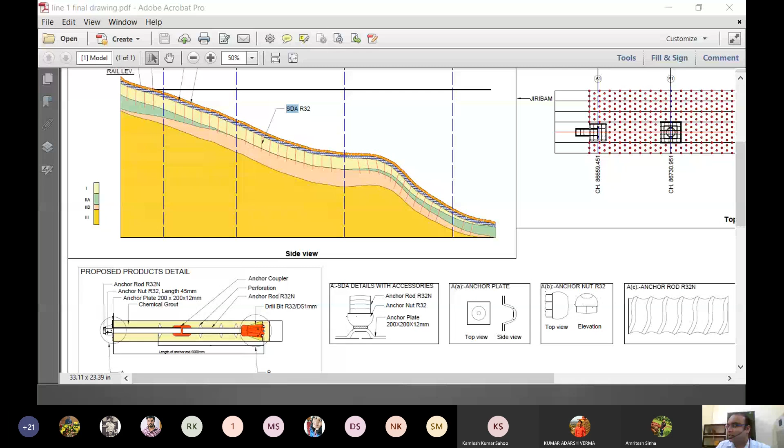Let me give you that. This is called a geocell. It's a polymeric material, some sort of plastic, that can be expanded by opening it. It generally comes in a collapsed form, and if you expand it, it spreads into a honeycomb structure that can be laid on slopes.

You can fill these geocells up with material. What it does is hold the slope together and creates a bonding effect across the whole slope surface, so superficial erosion is prevented, and the bearing capacity of the surface increases a lot because you've given reinforcement. The bearing of the area improves, so you can put more load over it.

This is also much used in railways and roadways to improve the condition of sub-base layers. You can fill it with concrete, gravel, anything you want, and it improves the condition a lot. So this is one way of stabilization.

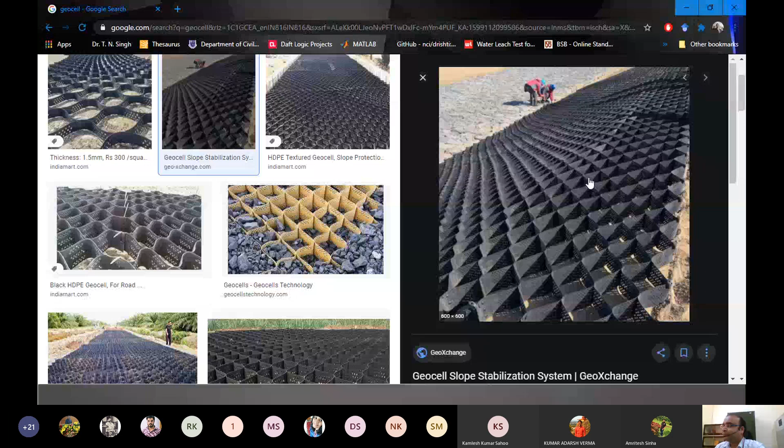Another requirement was greenery, so we also decided to put a jute geotextile over it. Jute geotextile is a porous material that prevents soil from falling off, like jute bags, 'bori' material. We proposed filling the geocells with soil and putting jute geotextile over it. If you spread that, surface erosion is prevented for some time, and plantation was encouraged.

So threefold - sometimes so many solutions have to be given just for a single slope. That's what I wanted to show, how a simple slope stabilization work can be done.

This was done on Slide. Later on, we also used finite element method to see the comparative factor of safety between finite element and limit equilibrium methods. That also was done later on.

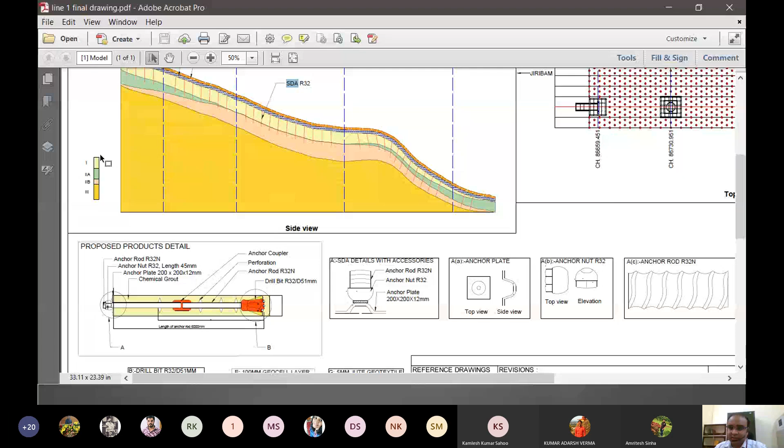So this was a thing. Any questions on this? This was something on the practical lines of how we get a case or a problem in the field and how we solve it, where we get data and all. So this was there in this case study. Is that okay? Any clarifications, suggestions, or questions?

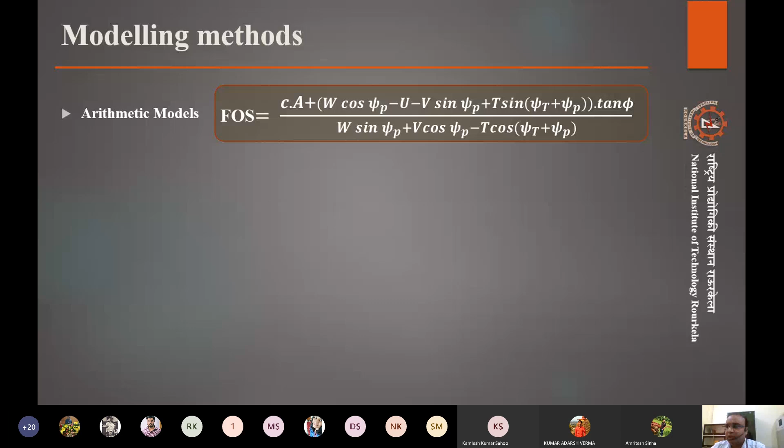So we have seen different modeling methods, right? We saw arithmetic models where factor of safety was calculated using deterministic formulas - cohesion, friction, weight, and angle of sliding were given, and you could calculate factor of safety directly. We also saw equilibrium models, the limit equilibrium method, when the complexity increased.

As we saw earlier, we were basically making ideal assumptions of a single planar failure, or at most seeing other iterations like the advent of tensile cracks that were causing failure in conjunction with planar failure, or doing tensile bolting that stabilized it. But essentially, in terms of geometry, we were idealizing it as a smooth profile with no undulations, different shapes or sizes - the geometry was quite simple, and assumptions were made to keep it idealized.

When we moved ahead with the more complex geometries, we saw how it can be done in the limit equilibrium method. We could actually divide the whole slope into slices, and we saw which of these slip circles or slip surfaces, if not circular, were the main failure surfaces giving us the lowest factor of safety.

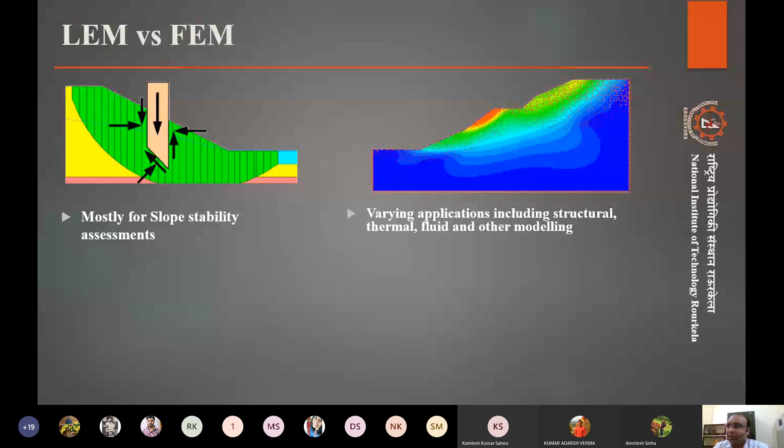In terms of geometry, limit equilibrium is just based on simple slope type geometries, because that's the whole purpose of it. In finite element, there is no restriction of what kind of slope, what kind of geometry we have.

In the slide software, you might be remembering, we had to actually define the direction of the slope as well. In the settings, we have to define which direction the slope is oriented, because the algorithm is not developed enough to predict the direction of the slope. If there is a complex slope that is unclear to it, it cannot do the limit equilibrium analysis.

Even if you try doing an analysis where you have two sets of slopes, a right side and a left side, like we had in this case study with two different slopes on the left and right, the analysis was done for one side at a time. Because in limit equilibrium, the slide software cannot just by algorithms define where the slopes are and find the slip circles, since that algorithm isn't developed enough to detect where the slopes are. So we have to tell it these are the slopes, this is the direction, now find the slip circles. That's how that software is designed.

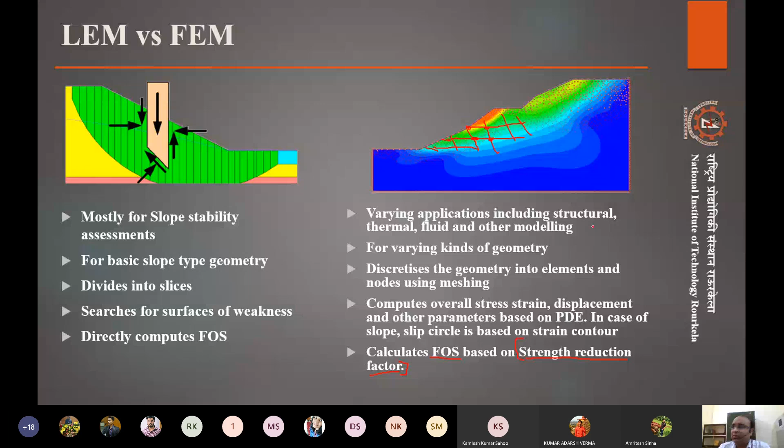Coming to finite element method, it works on the basis of representative or objective functions that define the physical phenomena. Those are generally partial differential equations, PDEs - don't confuse it with PDF, that's probability distribution function. Complex phenomena are generally defined in these terms, and to find a solution within certain domains, you have to solve these PDEs. That's how a numerical solution is found.

So how do we do that? We first divide the geometry into different segments. As I was talking about, we do something called discretization and meshing. Comparing it with limit equilibrium, where we make slices and surfaces, here we divide a model into different elements and nodes - small elements, called finite elements.

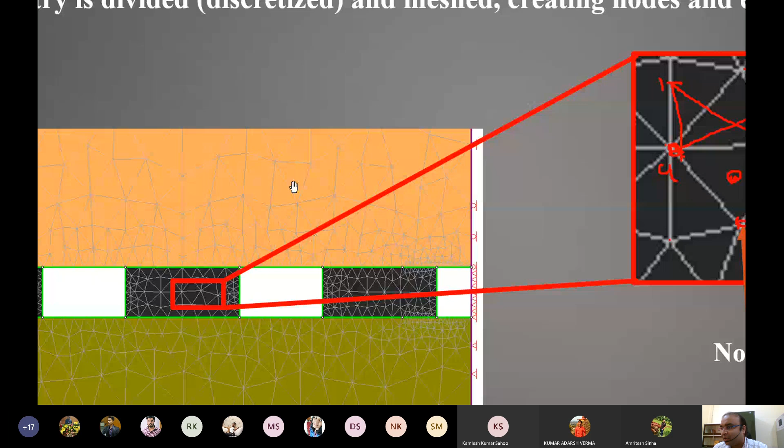Why is that? Because I am more concerned about the stability of these pillar portions. I want to see whether these will be stable or not, whether I have to do more stowing work or additionally support this area in order to excavate. So I'm more interested in that, and that's why I've made the mesh densely here. Compared to that, the portion here has a distance between nodes of maybe 5 or 10. So that's how we sometimes change the density of mesh, or change the size of mesh, and so on.

So in terms of elements, there are different sorts of meshing we can do. We can divide 2-dimensional geometries into triangular portions, or into four-sided shapes like a square, rhombus, or rectangle. In 1-dimensional geometry, like a heat transfer problem, we can have just a single line element.

In a single element, we can have multiple nodes in between as well. This calculates the main values at these nodes. So if in a triangle we put more nodes, this is called a 6-node triangle element, which calculates the position at 6 points from the governing equation.

So only approximation is done in between, while the nodal values are already known from the governing equation. This gives more accuracy, but calculation time increases. However, with fewer elements and more nodes per element, the approximations will be similar compared to having more triangles.

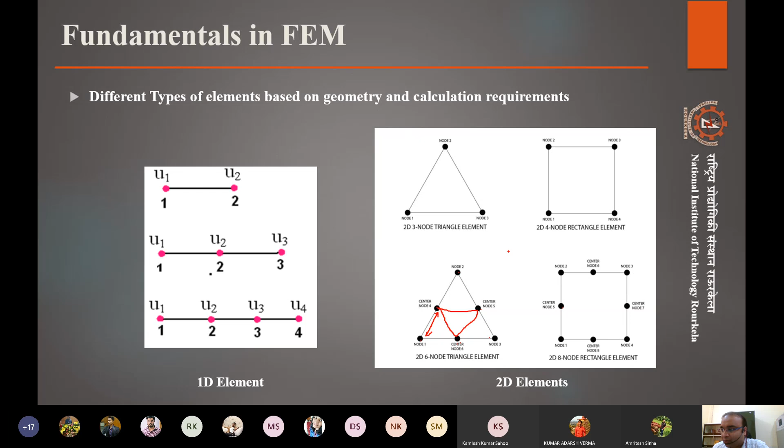There are also three-dimensional elements if we do a three-dimensional geometry analysis. Similarly, in three dimensions you calculate at certain points, and the values in between are approximated. So the concept is the same even in 3D.

Also in 2D as well as 3D, we can have second order elements. What does that mean? Basically, even the mesh shape can be altered, and the single elements can change based on what kind of nodes we have positioned.

This is helpful when we have certain geometries, like a circular shape. If we divide it into simple triangles, that may not represent the properties on the outside or boundary conditions well. Curvilinear elements are sometimes helpful in suiting that kind of geometry. So based on the work we are doing, we can choose these kinds of geometries.

I'll stop here. We have a lot to discuss, but let's not throw too much information right now — it's been a long class today. So let's stop here. Till now we've just started finite element, seeing how it's a little different from the previous examples and how the calculations are done.